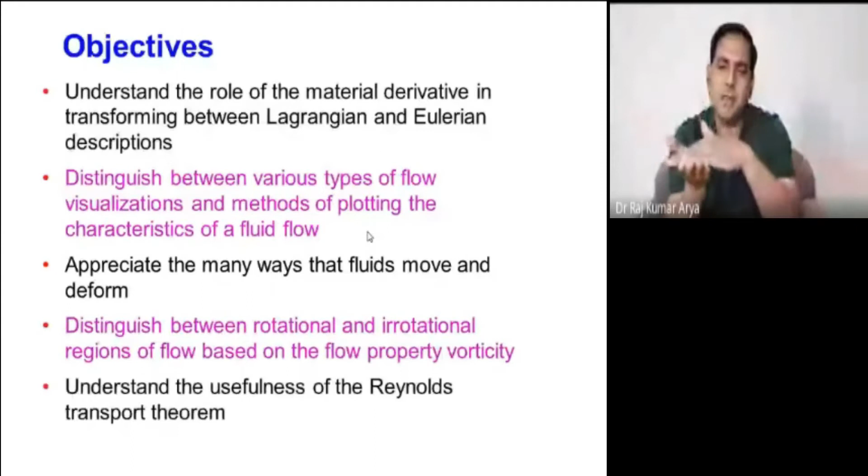So primarily you have this type of rectangle, you have moved it completely, but now you have compressed or expanded it. So it could be possible that the fluid, or let's say a fluid element, may get compressed or expanded. So that's called the deformational part. So that also we will study.

Then you have rotational. So that is again the flow patterns, because these two can also happen. Once you are doing the fluid flow, it would be either rotational or irrotational, because these are the two possible types of flow, or a mixture of the two could also sometimes be possible.

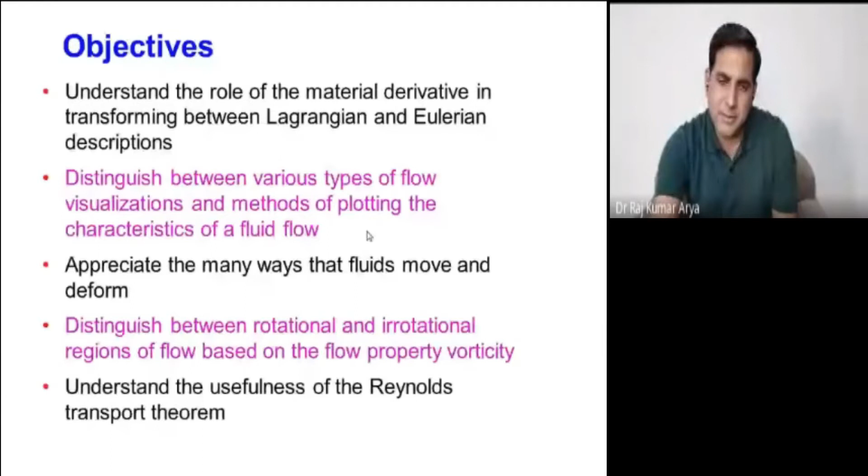Okay. Then we have Reynolds transport theorem. First we will understand what it actually is, and then we will apply it to do the various calculations of forces or velocity. So these are the primary objectives of this particular topic.

Now, for these three particles, you want to focus on how particle A would move, where it will go, its motion, its trajectory, everything. Same thing you want for B, what is happening with B. Same thing for C. So you are focusing on individual particles, what is happening to each individual particle, and you want to keep track of them. So this approach is called the Lagrange approach. Here you focus on individual particles, and this approach needs a lot of equations.

Say you have three particles. For each particle, what can you write? You can write one force balance. Yes or no? Yes, sir. Newton's laws of motion, you have three, right? V equals U plus AT. Then V square equals U square plus 2AS. Then you have one for distance traveled in the Tth second. S equals UT plus 1 by 2 AT square. So you have three. Those are the laws of motion.

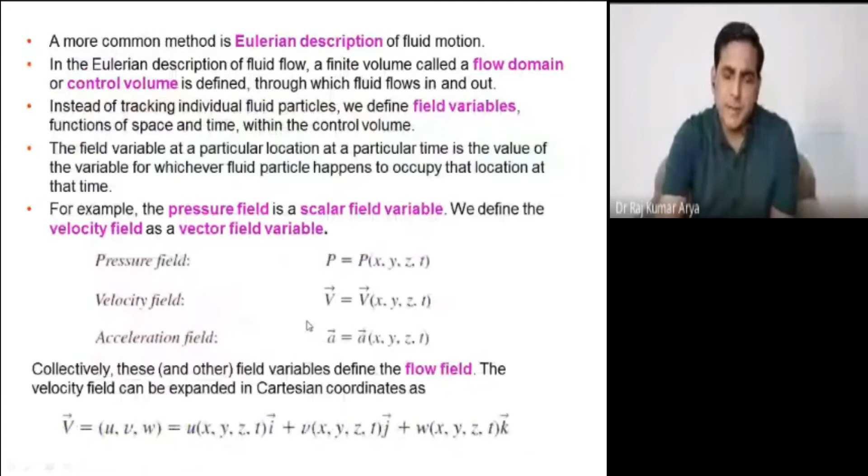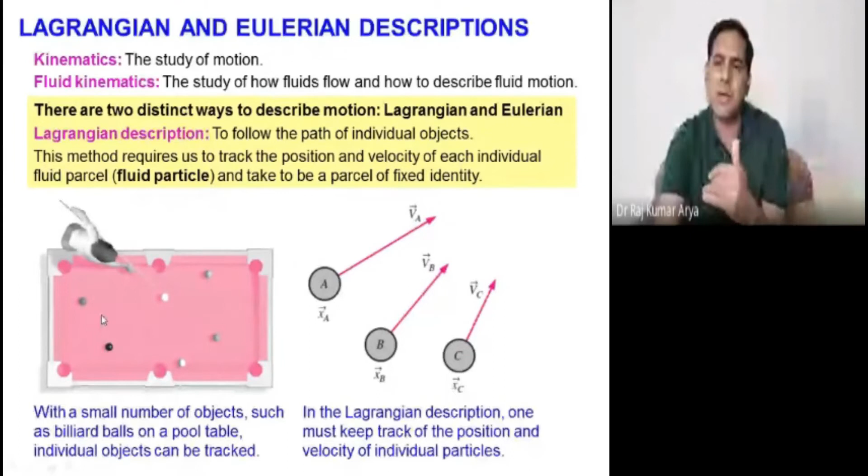Now you focus on the entrance and on the exit point. What are these parameters there? So you are just focusing only at boundaries. You are not interested in between here, which particle is moving slow or fast; you are not interested in that. You want the total parameter at this cross section, at entry and exit. So that approach is called the Eulerian approach, and that's just like your semester system or degree system.

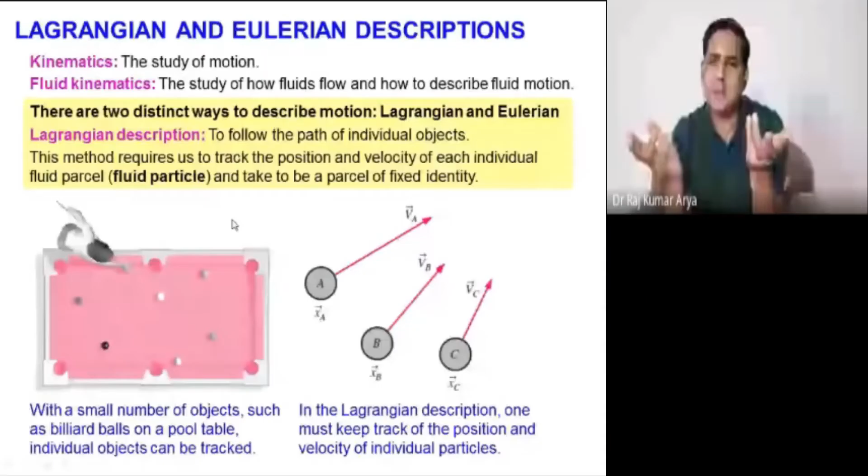Semester means you study throughout the semester, and at the end of the day, your parents and everybody want to know your marks. If your marks are good, everybody is happy. Good or bad, you can leave that for the time being. They are focusing on marks. You got admission, now you give an exam, tell me your output. That's all. So this is called the Eulerian approach.

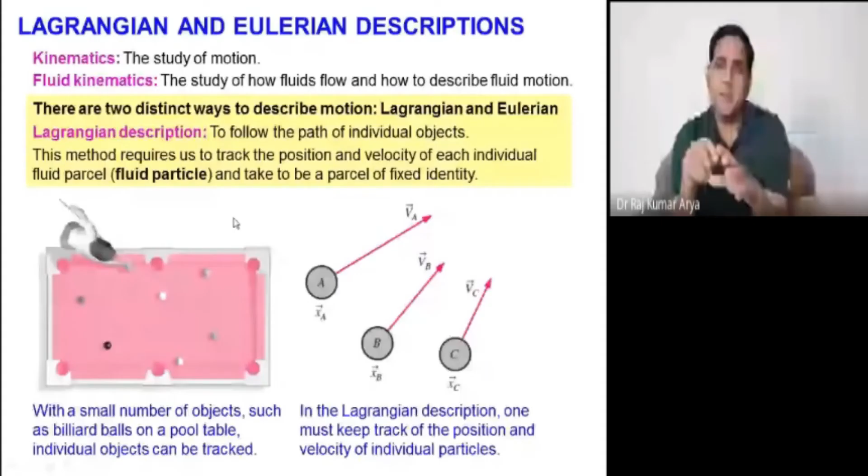Lagrangian means now you will ask how much you got in your mid semester, how much in test one, how much in test two, day-to-day performance and all this, and that too for individual students of the class. So that's called Lagrangian. So that's the difference.

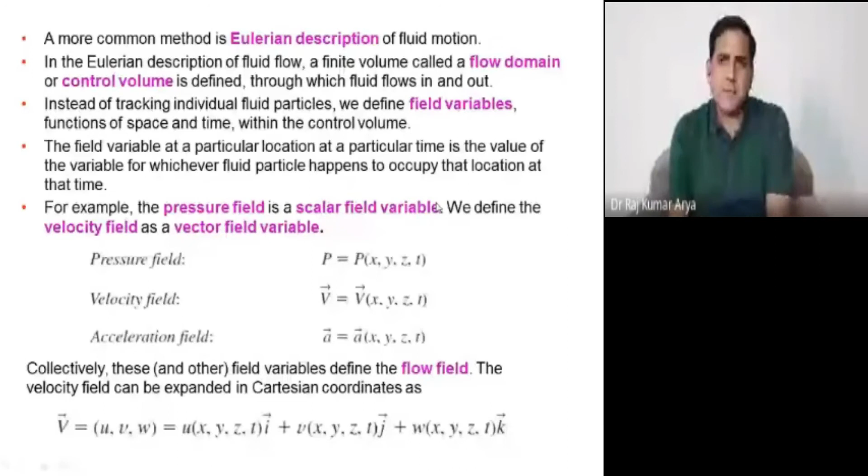Now each fluid particle would have these fluid properties. There could be many more, but we are interested only in flow. We need pressure because pressure is the driving force for us. Once you have a driving force, obviously you will have a velocity. And if velocity changes with respect to time, you will get acceleration. So these are the three things in flow of fluid: without pressure, the thing will not flow, then velocity and acceleration. So pressure, that is your driving force, then velocity, then acceleration.

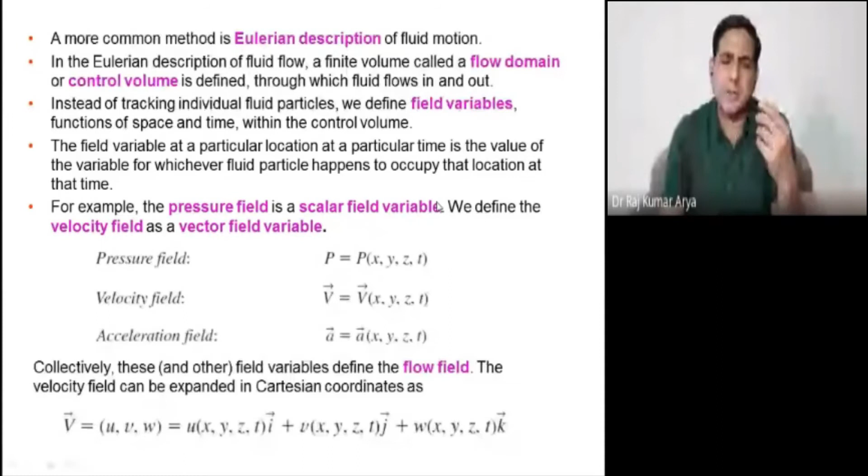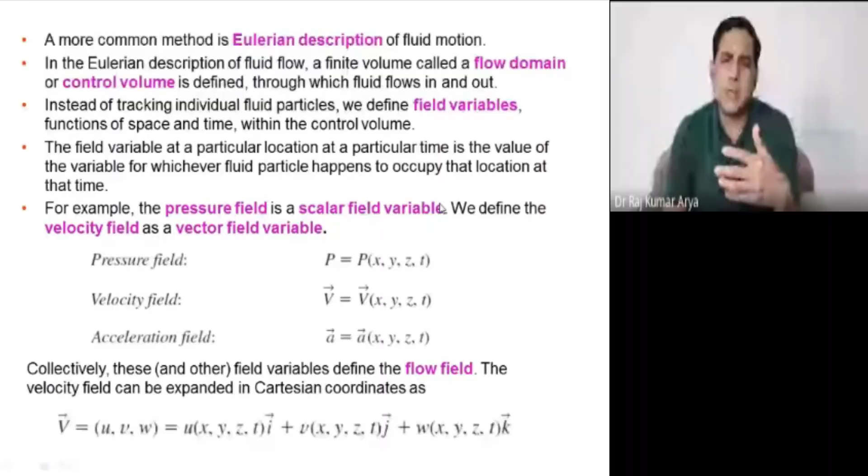Now pressure, velocity, and acceleration are all functions of mainly the three coordinates x, y, z, and one more parameter, that is time, depending on whether your fluid behavior is time dependent or not. Let's say you have unsteady state operations, then you will have a time function also. Whenever your plant is working, most of the time it goes through the unsteady state. You are continuously providing energy to the fluid to make it flow.

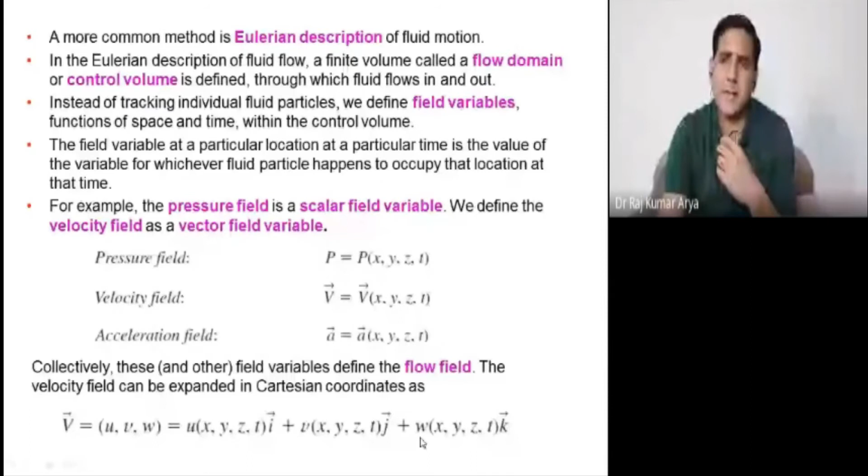So then each component: let's say the velocity vector has three components, one in the x direction, i cap, one in the y direction, j cap, and one in the z direction, k cap. And all of these could be functions of x, y, z, and t. So your u component of velocity would have all four factors. Same for the v component and for w. So all of them can have these four variables at max. That is the maximum dependency.

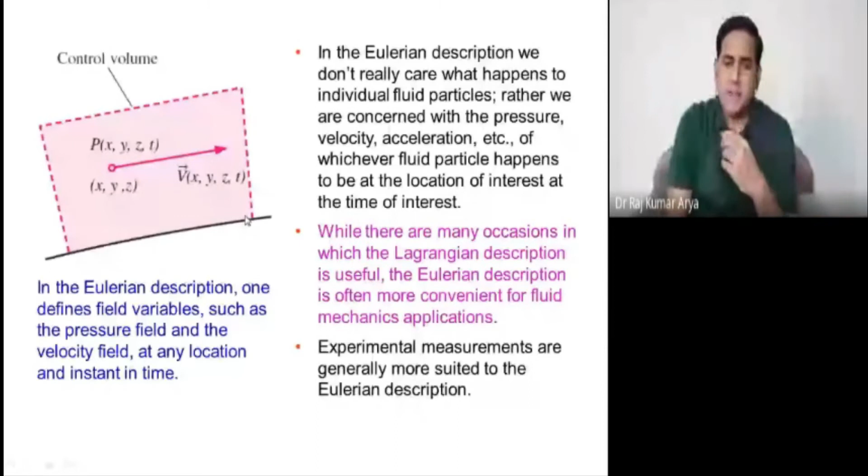Now this is one of the examples we already did. You have a velocity field given as V = (0.5 + 0.8x) i cap + (1.5 - 0.8y) j cap. The question is a steady, incompressible, two-dimensional velocity field. Two-dimensional means you have two coordinates at that particular point, x and y, or x and z, or y and z. That makes it two-dimensional.

If only x is there throughout, then it becomes one-dimensional. If it has x and y, or let's say this velocity can be differentiated with respect to x, y, or z, then if you are getting two derivatives, it is two-dimensional.

If you are getting three derivatives, three-dimensional. If you are just getting one derivative and the rest are zero, it means one-dimensional. So that is the way to identify the dimensions of the flow. Or visually, you can also see: if you have x, y, z present, three-dimensional; if any two coordinates are present, two-dimensional. If only one coordinate is present, then one-dimensional.

Fine. Here x and y coordinates are in meters and the magnitude of velocity in meters per second. Now a stagnation point is defined as a point where the velocity of the flow field is zero. So you want to find the stagnation point coordinates where this velocity is zero. How can you find that? To make the velocity equal to zero, each individual component of the velocity must be zero.

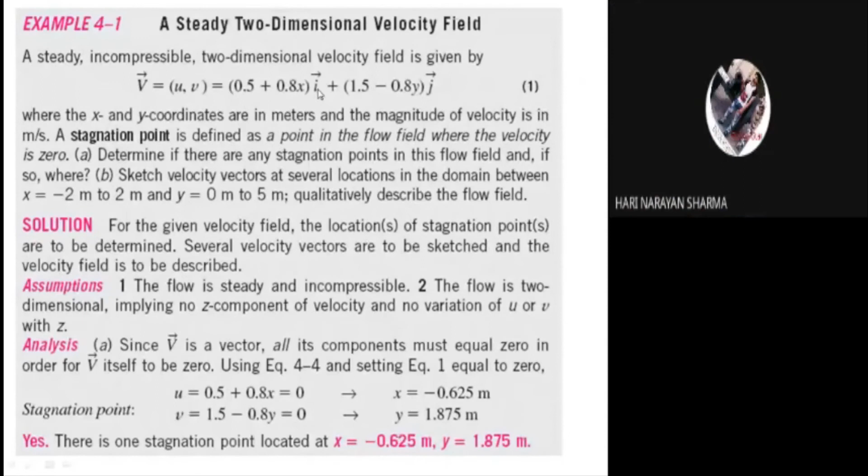Yes, sir. So for the streamline, this is your u and this is your v. For the streamline, dy upon dx would be equal to v upon u, right? Yes, sir. Based on that, the equation can be derived and plotted, or you can do it without that. How? Just put a particular value of x, then keep changing y, and you get your velocity components for each x and y. Yes or no? Yes. You keep changing the coordinates and plot, and that way you also get the streamlines.

Or you derive the streamline equation first, and based on that this can be plotted. This is the mesh they have given you, minus 2 to 2. Minus 2 is here and 2 is here. Then 0 to 5 here. So in between, you are asked to plot your velocity profile or the streamlines.

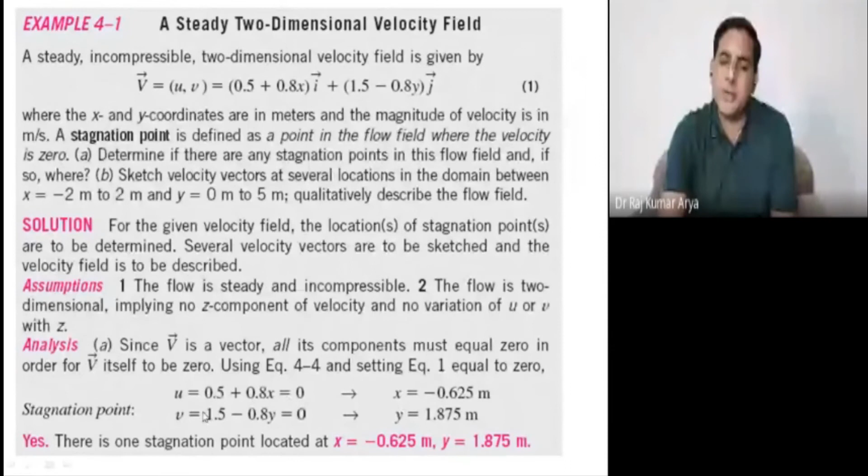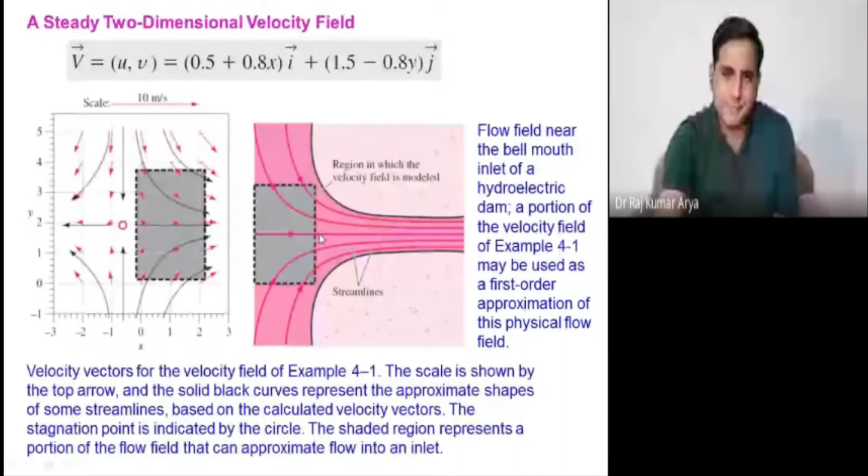So you have learned one point here, the stagnation point. A stagnation point is where each individual component of velocity must be equal to zero. There should not be any velocity magnitude in any direction. Fine? Now we want to see the acceleration part.

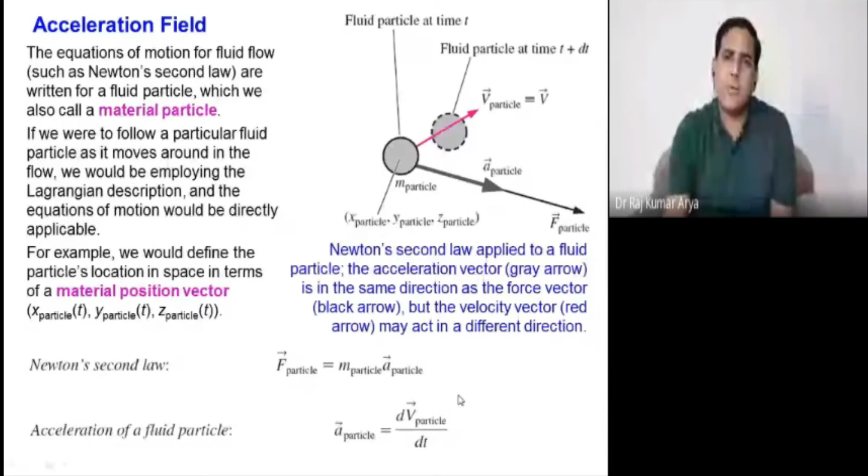Okay? So your force would be mass into acceleration, and acceleration is calculated by dv upon dt. This is the simple thing you have. Now the particle has velocity. It could be a function of x, of y, of z. So your velocity is a function of x, y, z and time. If you want to calculate the total derivative of v, we have four components: x, y, z and t, right? So first you partially differentiate v, del v upon del t, multiplied by dt upon dt; this is the derivative of v with respect to t.

Same thing with respect to x, y and z; add all those derivatives, and that is called the total derivative of this particular particle. Okay? Is that fine till here? Total derivative: find the derivative with each individual parameter, that's called partial, multiplied by the change there. Or del v you can write in several ways. If you write it here, this will get cancelled. This is the derivative with respect to time, del v upon del t. Again with respect to time you are multiplying two terms here, dt upon dt. This will get cancelled, so you are just getting the derivative with respect to time.

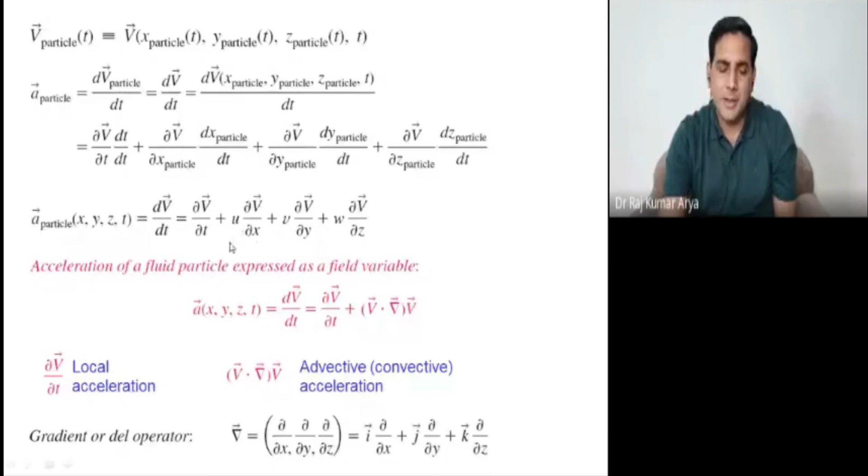Same thing here for del v upon del z: the movement in z direction divided by time. This is the w. So you can rewrite the acceleration of the particle in this particular format. Fine. So this underlined term here, the last three terms, are called the convective acceleration of the particles.

Because this is just the change in velocity of a particular particle. Okay, so that may change due to the motion of fluid particles only. Now this ∂V/∂t, this first term which is not underlined, is called the local acceleration of the particle. It would be just a function of time.

Let's say every 5 minutes you are providing 100 joules. So your velocity would change only at every 5 minutes. After that, it won't change. So that would provide your local acceleration here. You are just providing at a particular time interval. Sometimes you are providing every second 100 joules or 50 joules.

Okay, so this first term is called local acceleration of the particle, and this is called convective acceleration of the particles. Fine. There's one more term here, the del operator. The del operator is given by i cap ∂/∂x, j cap ∂/∂y, k cap ∂/∂z. This is called the del operator. So if you have this velocity and this del operator, multiply by this V, you should get this derivation.

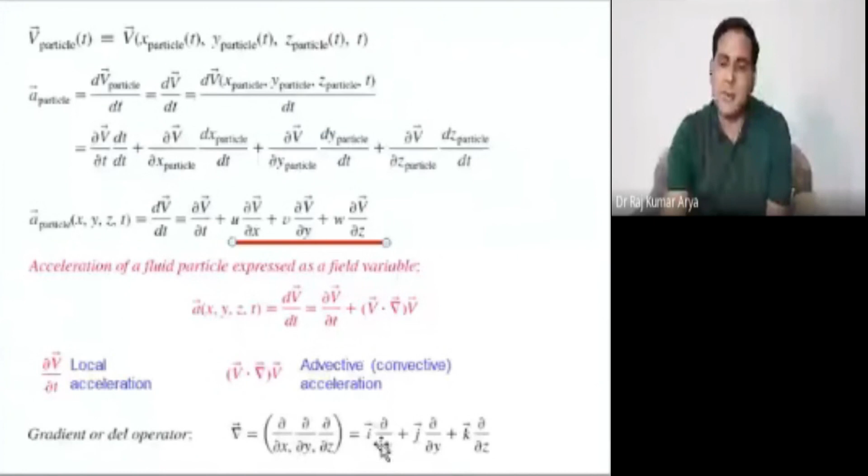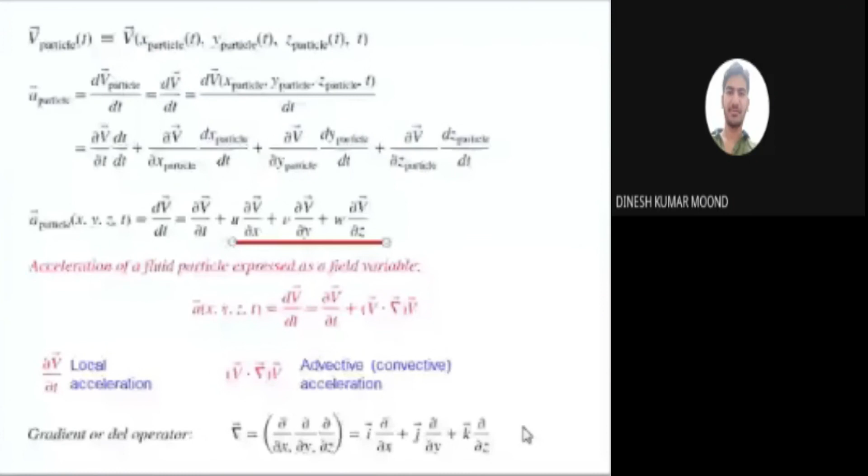Now you have the del operator, given by i cap ∂/∂x, j cap ∂/∂y, k cap ∂/∂z. So you have two vectors. Now you are doing dot products. So i dot i is how much? One. And i dot j? Zero. Right? So if you do it that way, you will get this equation back. So just try that.

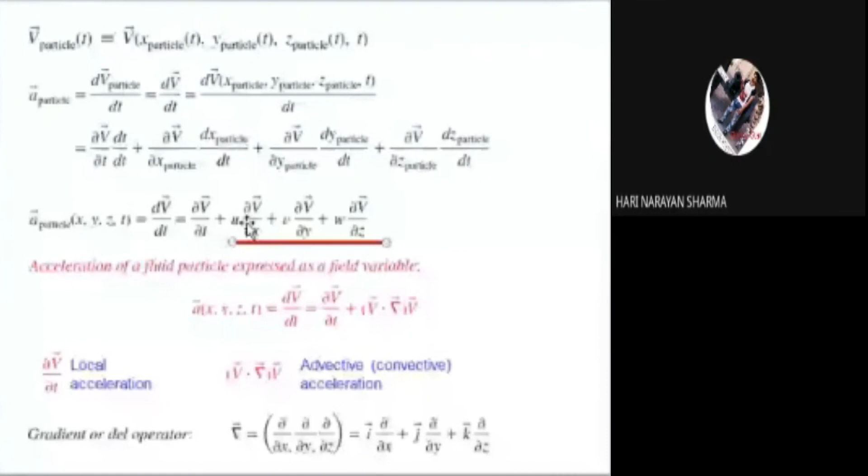Wherever you have i dot i, you are getting u. So i would be there with u only. So you will get i dot i equals 1, you have u there. Then multiplying this by the term V, V comes here directly. So you got u ∂V/∂x, the first term. Yes or no? Yes, sir. Then you will get the second term, then the third.

So we will end this class here. You can write here acceleration. Previously you got the total acceleration of the particle. Now because you have 3D flow, you want the acceleration in x, y, and z directions. This is called total acceleration here. Now you want to write acceleration in x direction, y direction, z direction.

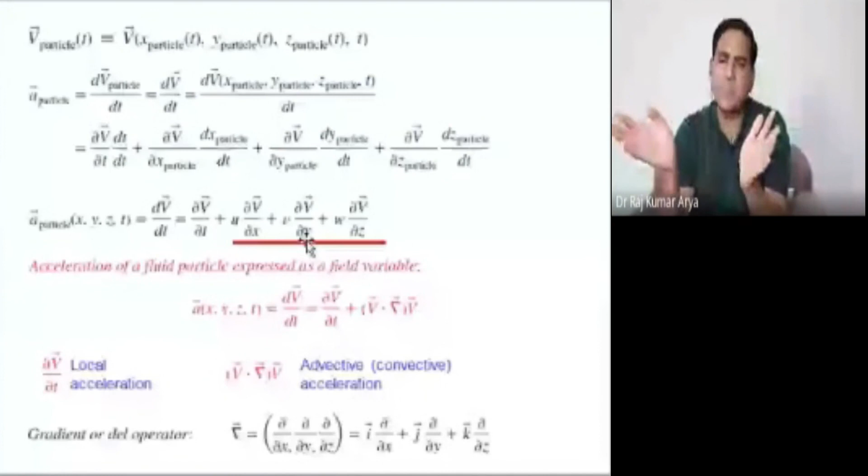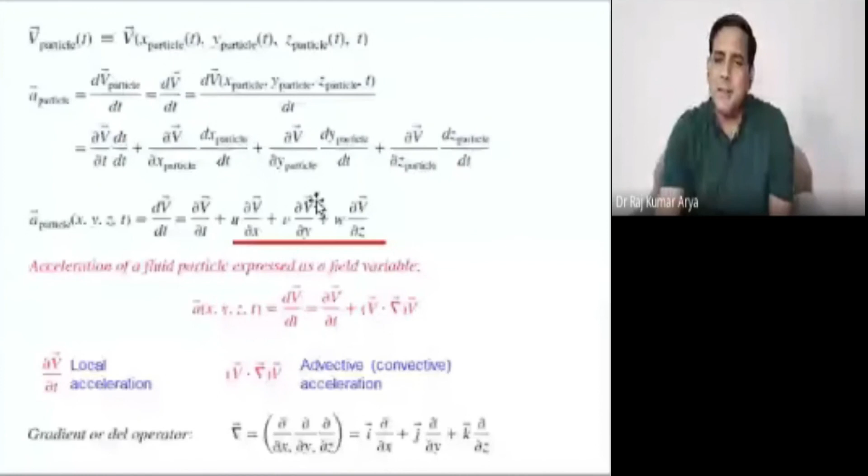So you club all the components which go into i cap, j cap, and k cap. You can segregate this line into 3 parameters. Yes or no? So this is the x component of the acceleration, taking everything in the x direction. For the x component, what is the velocity there? u. Yes, sir. So everywhere V is replaced by u: here u, here u. So this gives you the x acceleration.

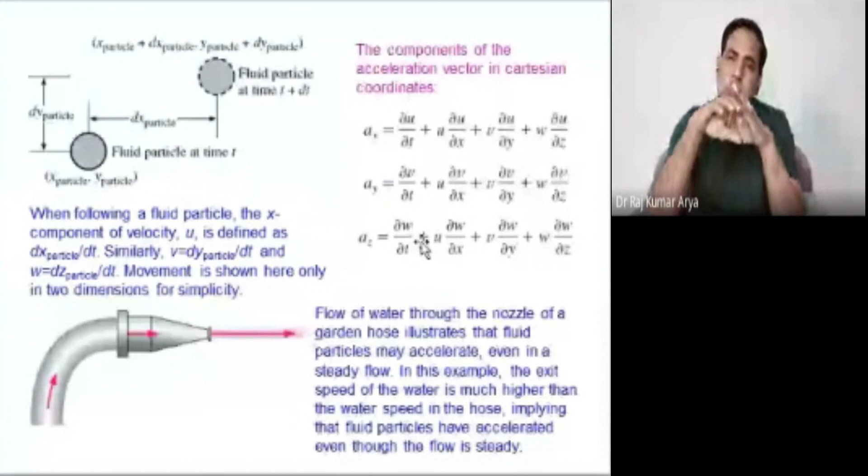Same way for y, capital V is replaced by small v there, so you have v here also. Same thing for z direction, you have w. So these three equations give you the acceleration in individual coordinates x, y, and z. Fine.

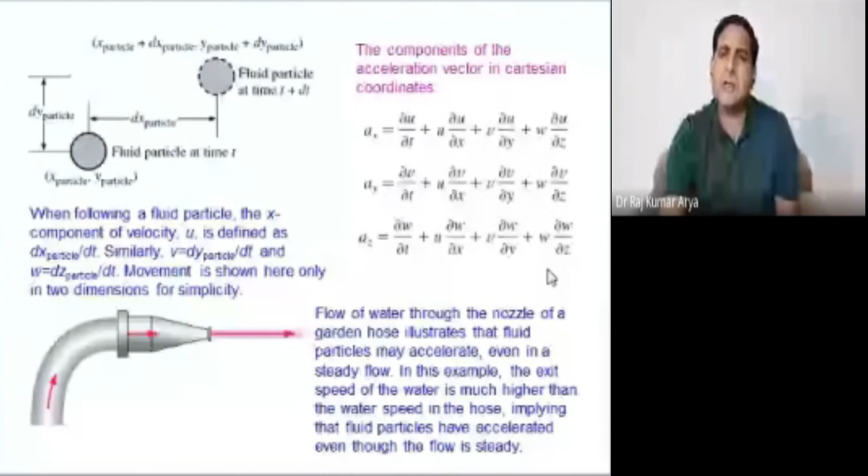So the rest we will do in the next class. Okay. Try to do the derivation and try to find this also. Can you get the x component, y component, or z component from that line? Okay. Okay, sir. Okay, then we will close here.